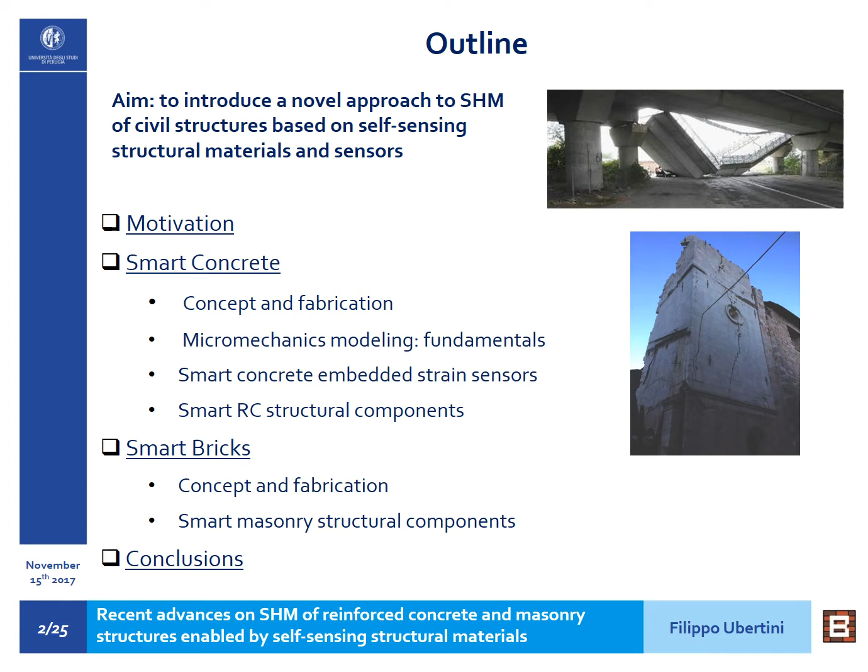So let's come to the motivation of the work. The research I'm presenting is framed in the field of structural health monitoring, which refers to all those technologies that try to use the information provided by sensing systems installed over a structure to understand the state of the structure and to possibly detect and locate damage forming in the same structure.

The application is anticipating major collapses and providing information useful for an optimal organization of maintenance and retrofitting strategies, with applications on aging infrastructure networks as well as cultural heritage structures, for instance exposed to seismic hazard. Applications of SHM in civil engineering are, however, still limited.

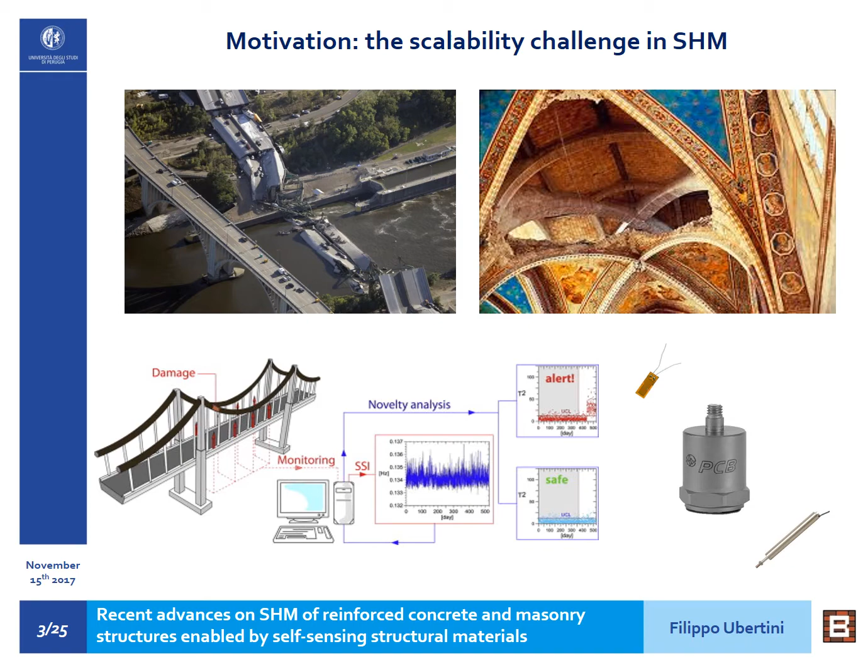One of the most important challenges limiting such applications, in our opinion, is what we call the scalability challenge or scalability issue. With this term we refer to the circumstance that sensors used for SHM are typically very small compared to the large sizes of the structures being monitored, with the consequence that the damage detection and localization task becomes more and more difficult as the size of the structures increases.

One possibility of overcoming this issue is going towards self-sensing structures and self-sensing systems. A self-sensing structure is essentially a structure made of a special material that is itself a sensor. The material can provide information on its state of strain and direct information regarding the formation of a crack or damage. In this slide, for instance, I show an example of a self-sensing pavement.

This is a road pavement made of a special smart material that is able to sense the presence of a vehicle and to weigh in motion this vehicle, providing information that can be used for fatigue evaluation of the pavement itself or fatigue evaluation of the substructure, for instance a steel bridge, and for understanding the state of stress in the substructure and so on.

In this research we achieved this smart property in concrete and clay bricks by doping these construction materials with electrically conductive nano-inclusions. In particular, we'll see nanotubes, carbon nanotubes that create conductive networks inside the materials such that the materials themselves become conductors.

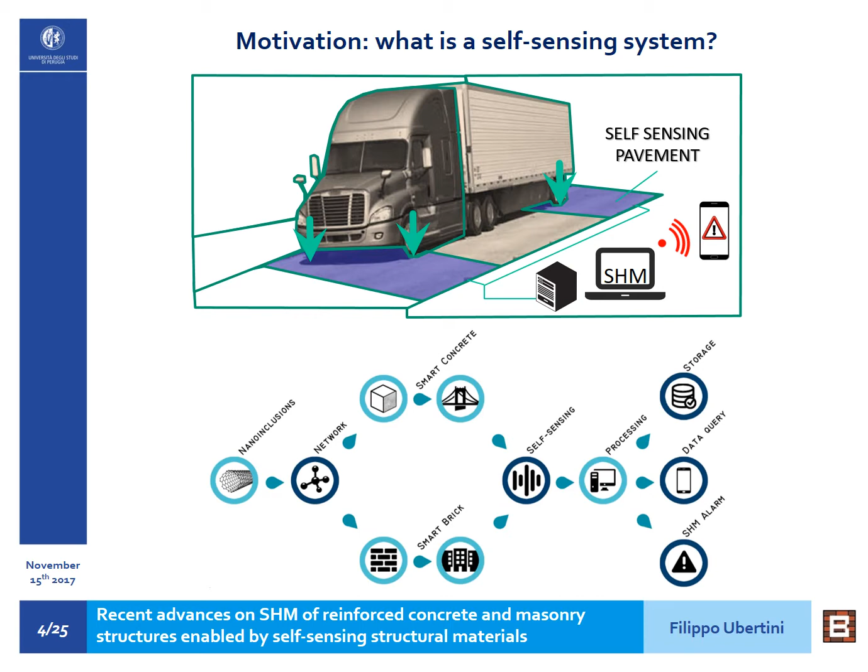This way we achieve smart concrete and smart brick that are self-sensing in the sense that they can output measurable changes in their electrical properties under application of an external mechanical input, particularly when they are strained. This information can be easily processed for SHM purposes for direct crack detection, therefore solving the scalability issue I was mentioning at the beginning.

So let's come to the smart concrete technology. The idea of smart concrete is actually not new. It was early proposed by Deborah Chung at University of Buffalo in the early 90s, and in recent years this topic has received considerable attention with a lot of scientific papers devoted to smart concrete.

Smart concrete essentially is a concrete with dispersed electrically conductive nano-inclusions such as nanofibers or carbon nanotubes that create conductive networks, making the overall composite become an electrical conductor. What is very important here is the proper dispersion of the nano-inclusions or nanofibers, which needs to be achieved with suitable fabrication procedures, as we will see in the next slides.

But if the dispersion is good, then we can achieve a very nice percolation-like behavior, as shown on the top right diagram of this slide, where the electrical conductivity suddenly increases when the amount of nanofibers or nanotubes or nano-inclusions reaches a critical threshold that is called the percolation threshold.

When the material is at percolation, it's not only a good conductor, but also a very nice strain sensor. So for instance, if we measure the electrical resistance across two points of a specimen using embedded electrodes, we obtain a quantity that is very sensitive to the strain.

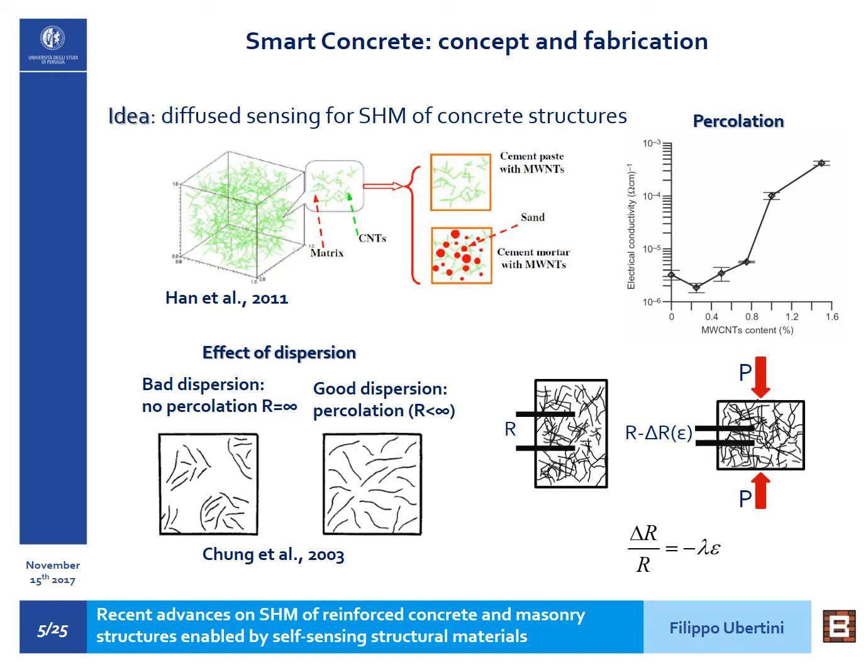If we apply a uniaxial compression load to the specimen and induce a uniaxial compression strain, we also induce a reduction in the electrical resistance. The relative change in electrical resistance is actually very close to being proportional to the uniaxial strain through the coefficient lambda, which we call the gauge factor of the sensor.

Here are a few highlights of how we fabricate smart concrete and smart concrete sensors in our lab at University of Perugia. On the top left you see the fabrication procedure, where we first disperse the nanotubes in water using tailored chemicals called dispersants. Then we improve dispersion of the nanotubes through magnetic stirring, and in most cases through sonication and mechanical mixing.

Then we add the aggregates and the plasticizer to improve workability. We cast the composite into oiled molds, we embed the electrodes, and at the end we have these cubic smart sensors made of cement paste with nanotubes, or mortar with nanotubes, or concrete with nanotubes.

On the top right of the slide you see a few pictures of concrete specimens, whereby the white specimens are normal concrete and the dark specimens contain nanotubes, where it should be noted that only 1% of nanotubes are used in this case. You see how significant the change in color is, achieved with such a small amount of nanotubes, which is very remarkable.

On the bottom part of the slide you see SEM pictures showing the nanotubes creating a very nice network when dispersed in water on the left, and on the right you see the nanotubes creating the network when they are inside the hardened cement matrix.

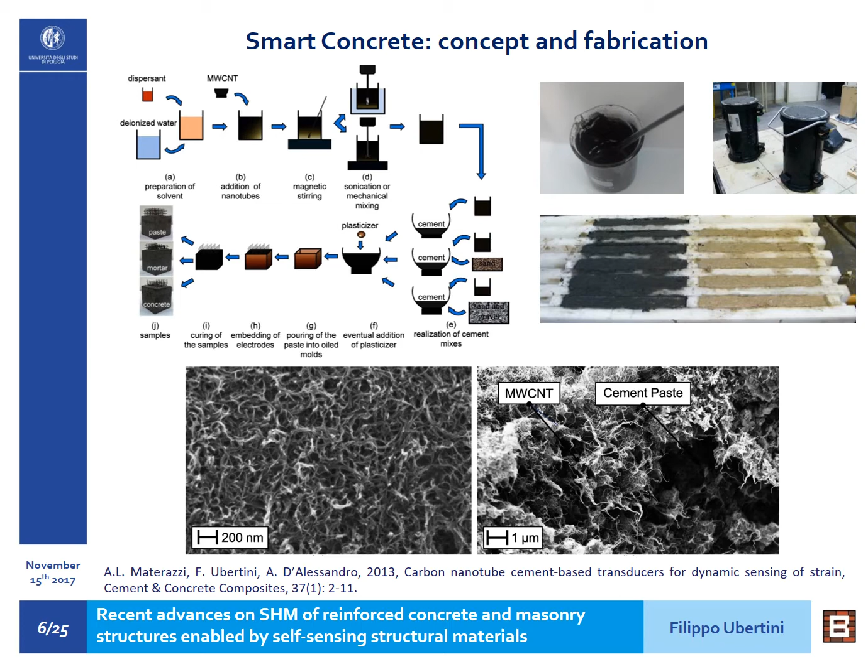Modeling the behavior of these composites is very important, especially to properly relate their electrical response to their state of strain. To this purpose, we have recently developed a micromechanics framework that is able to predict the overall properties of the composite, such as the elastic tensor and the electrical conductivity tensor, through a homogenization approach.

This method goes effectively from the nanoscale, modeling the single nanotube and its interface, to the microscale, accounting for the orientation of the nanofibers or nanotubes, to the macroscale, considering a representative volume element with a certain amount of dispersed nanotubes.

In this framework, we have considered peculiar aspects of these materials, such as the tendency of nanotubes to agglomerate into bundles that have a shape similar to the one shown in this SEM picture, the typical shape of an ellipsoid. We also take into account that the nanotubes are not straight, but rather they are bent and can assume curved shapes.

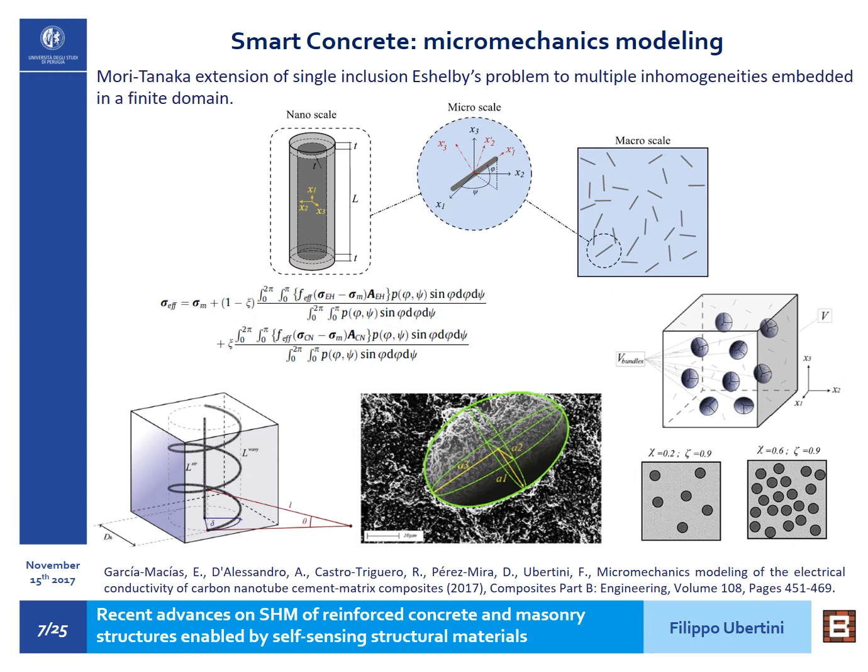With this framework, most importantly, we are able to properly model the strain sensing capability of the material, which means the change in electrical properties under application of a mechanical strain. As we have shown in previous work, we can identify three main mechanisms that govern this piezoresistivity.

The first one is the change in volume that causes reorientation of the fibers, which is taken into account through the so-called orientation distribution function. This is 1 when the nanotubes are uniformly and randomly oriented, and takes values different from 1 when the material is strained.

The second mechanism is the change in conductive networks that is due to strain. For instance, in strained conditions, there is a lower or higher probability of formation of conductive networks for a given amount of nano-inclusions, depending on the material being stretched or compressed.

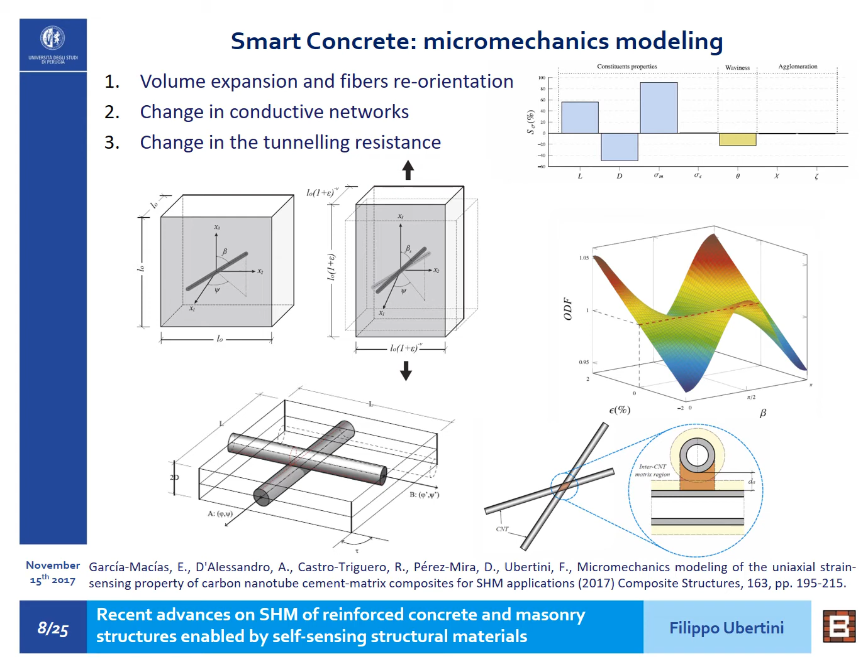The third mechanism is a change in the tunneling resistance, the resistance with which electrons jump from one nanotube to the next, and this change in tunneling resistance is due to the applied strain.

Here we see some results of the application of the proposed micromechanics framework. On the top you see results referring to cement paste with carbon nanotubes. In the middle part of the slide you see results referring to cement mortar with nanotubes, and on the bottom part you see results of concrete with carbon nanotubes.

On the left, the diagrams show the gauge factor against the amount of nanotubes in the composites, and on the right you see the overall electrical conductivity of the composite against the amount of nanotubes. The different lines show results referring to different values of the conductivity of the nanotubes, and the black squares show experimental results achieved in our lab.

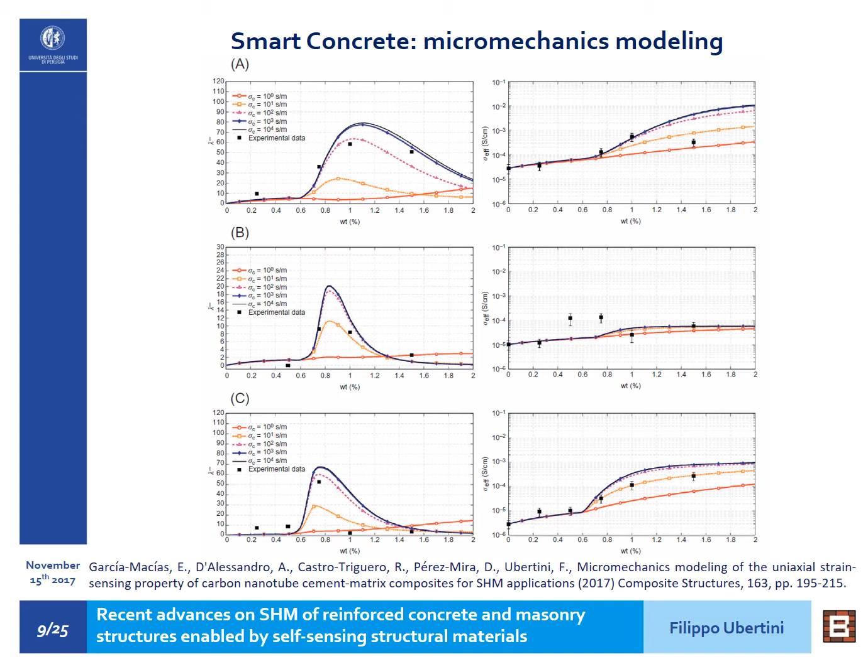What's very important from this result is that both theory and experiments confirm there exists an optimal amount of nanotubes that corresponds to a maximum gauge factor of the material, and this optimal amount of nanotubes is close to the percolation threshold. It's also notable that the theory can interpret the experimental results quite well.

Here let's come to the application of this smart concrete to manufacture strain sensors to be embedded into reinforced concrete structural components. On the top left of the slide you see typical cubic sensors that we fabricate in our lab. They are typically 5 centimeters by 5 centimeters by 5 centimeters, and they have 4 mesh electrodes embedded inside. The reason we have 4 electrodes is that we want to measure the electrical resistance with both a 2-probe or a 4-probe configuration.

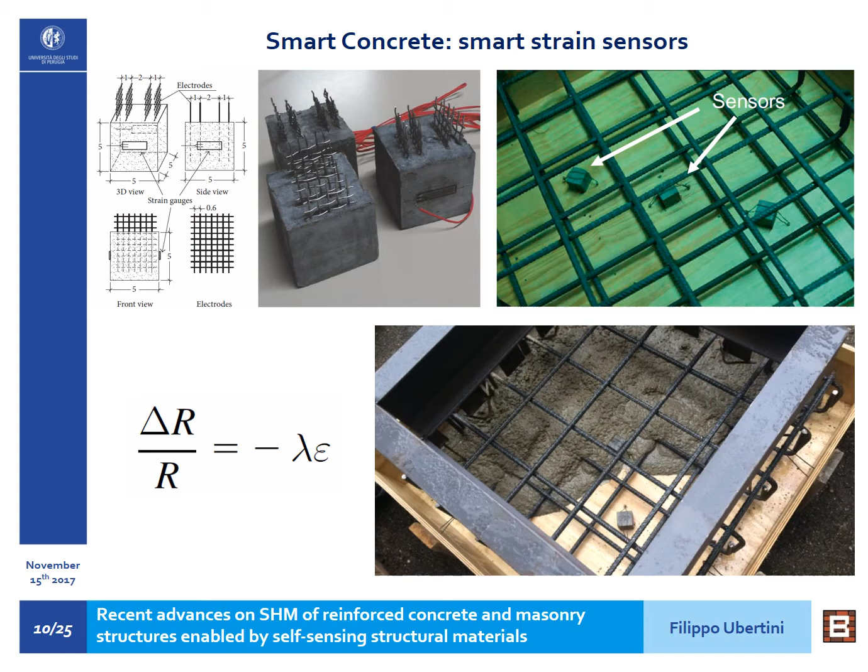On the right pictures of the slide you see sensors installed in an element before casting of concrete. Here we see results of the application of these sensors, in particular results of these sensors being tested in axial compression machines in the lab.

On the top right of the slide you see measured strain through strain gauges attached on the sensor's faces under the application of triangular loads, and corresponding relative change in electrical resistance in blue. You clearly see that there is a very good correspondence between strain and electrical response, which is also the case on the bottom right when applying dynamic loads, so sinusoidal loads with increasing frequency.

On the left you see the strain measured by strain gauges in a typical test with triangular loads, as well as the strain estimated by using the electrical output from a smart concrete sensor, in red. You also see that the relationship between change in resistance and strain is actually very much linear, as we assume in a very simplified model.

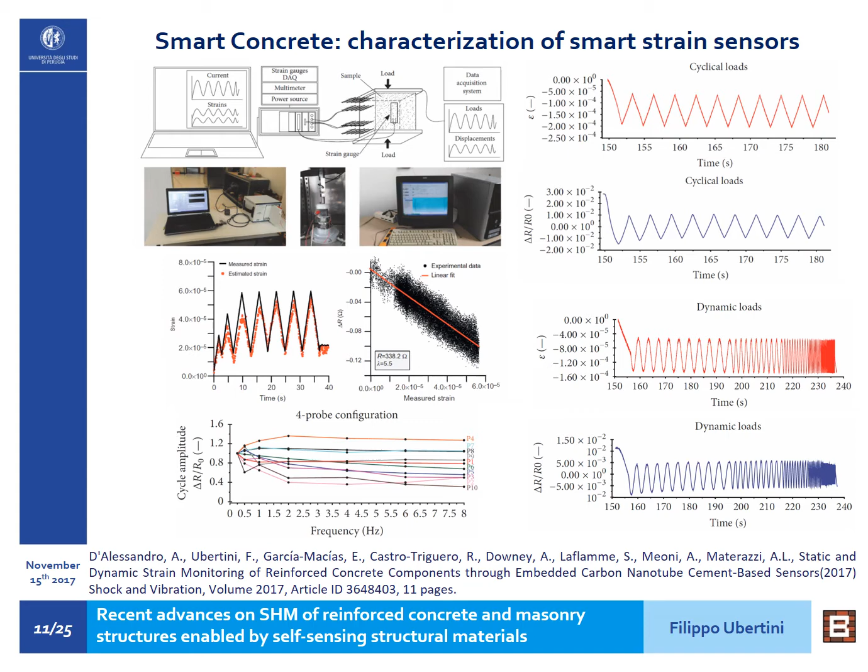What is also interesting is to investigate the amplitude of the response in terms of relative change in electrical resistance as a function of the mechanical frequency of the load acting on the sensor. This, which is called the frequency response function of the sensor, is typically a function that can be slightly increasing or slightly decreasing with the applied frequency, and we will see how this behavior can be justified in the next slide.

Here we see the application of the sensors when embedded into a reinforced concrete beam arranged in the lab. On the top right you see what happens when a person steps over the beam and then steps out from the beam, and this test is repeated 4 times.

In red you see the response measured through a strain gauge attached to the cement-based sensors, and in blue you see the response in terms of electrical current of the sensor placed at the mid-span. Clearly you see that with the cement-based sensors you detect the loading and unloading of the beam in a very clear way, and this is valid for all 4 times that the load is applied to the beam.

Then you also see the results of a test hitting the beam with a hammer in random locations over the beam. You see in red the measurement of a strain gauge, and in black the measurement of a smart concrete sensor at the same location as the strain gauge.

If we take a detailed view of a single hit, you clearly see that the time series of the measured strain is very well superimposed on the time series of the electrical output of the cement-based sensor.

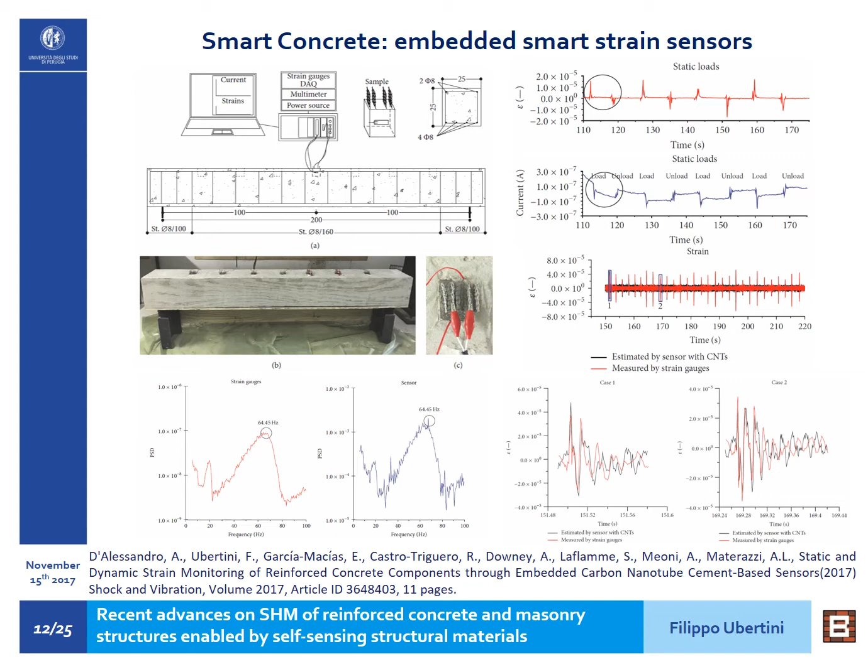Another important aspect in modeling the behavior of these sensors is being able to reproduce their time response. In this case, when time is involved, a modeling approach based on lumped electrical circuits is probably the most suitable method. In this slide you see the comparison between a typical model used in the literature...

The sensor is reproduced through an electrical resistor whose value changes with the applied strain, placed in parallel with a capacitor that reproduces the dielectric behavior of the material, and then of course there will be some contact resistance to close the circuit. On the right you see a more advanced model where we also add a third branch to the circuit.

That branch reproduces the piezoelectric behavior of the sensor that we have shown is present in these materials. Essentially, when the material is loaded, a little bit of voltage develops in the material itself. So the material is not only piezoresistive, but it also has some piezoelectric behavior, and this is introduced in the third branch of the model.

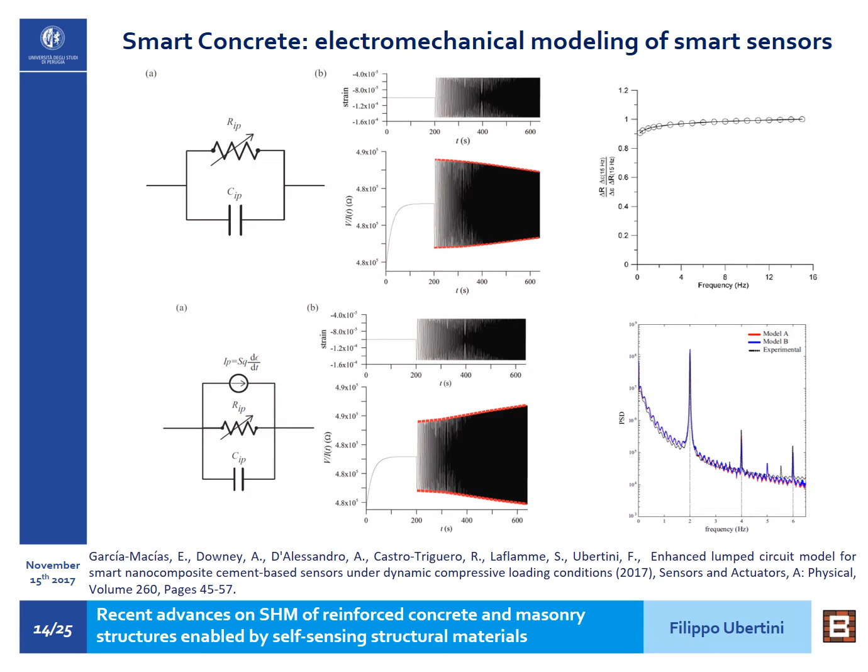Also very notable is that a similar model is able to reproduce the appearance of superharmonics in the response under harmonic loading, which is also something that we get from experiments, as shown in the diagram on the bottom right of the slide.

So let's now come to a second way in which smart concrete can be used in structural health monitoring. In this case, we do not want to use smart concrete to manufacture strain sensors, but rather to fabricate structural components that are fully made of conductive concrete. In this way, we could fabricate a local joint between a beam and a column, or build the rebar cover in a critical location of a structure.

This concept can be leveraged for damage detection, for instance, by trying to reproduce the electrical behavior of the material through a mesh of electrical resistors, as shown in the top left of this slide, whereby we can identify the values of these resistors by matching the experimentally measured electrical response of the material. When there is a damage in the material in the form of a crack, we are able to see this damage in the form of resistors with very high resistance.

The first problem that we have in applying a similar concept is that of eliminating the time drift in the electrical response of these materials that is due to the polarization, so the charge accumulation under a constant electrical field. To overcome this aspect, we have proposed recently a biphasic DC measurement approach, whereby the input we give to the material is not a steady input.

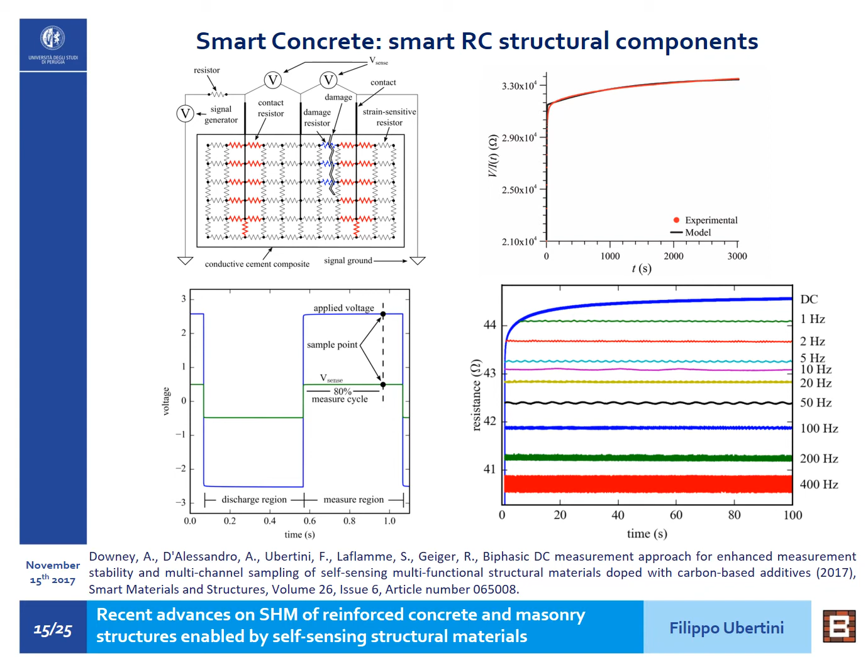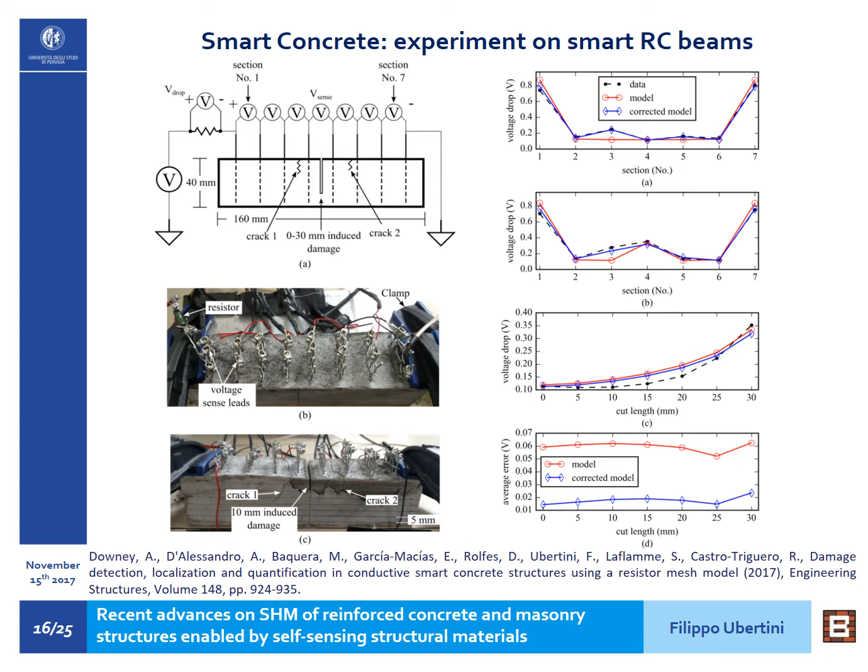So we can conclude that this approach of locally measuring the electrical resistance of the material, or the voltage drop under an external voltage input, is feasible for detecting and locating a damage.

What we see in these results is that in a very initial part of the diagram, we have increases in voltage drop with increasing load, and those are essentially due to the deformation that the load determines in the material, and here what dominates is the tensile strain that results in a local increase in electrical resistance because the electrodes are in the bottom part of the beam.

And then at a certain point, when a damage forms, a shear crack starts to form outside of the region where we have the electrodes, we have sudden changes in the voltage drops across different sections of the beam.

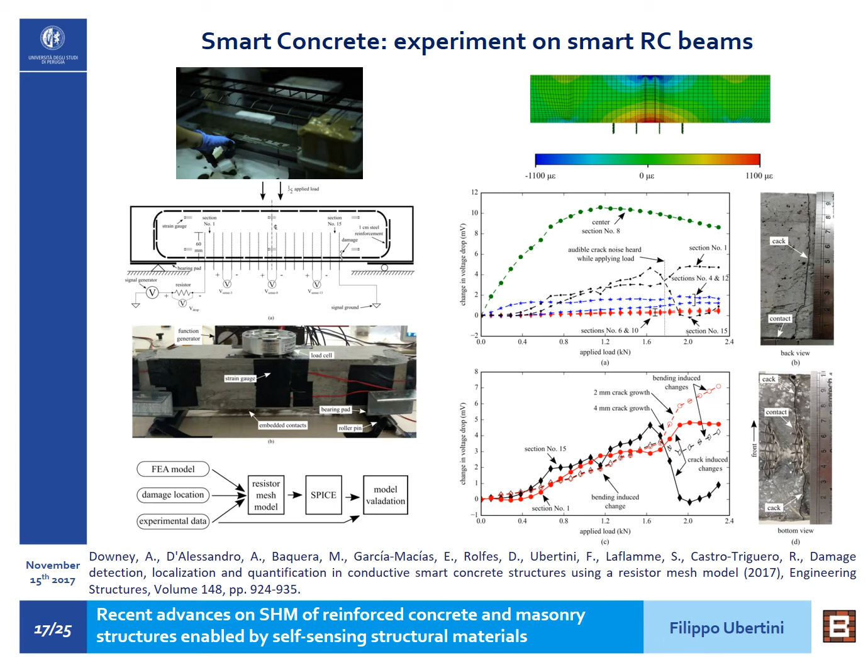So these changes clearly highlight that something has happened in the beam, which confirms again that a similar approach based on a resistor mesh model can allow damage detection and localization, leveraging the electrical conductivity of the material.

Here is another example conceived to demonstrate the possibility of detecting damage in smart concrete structures. The example consists of a smart concrete plate, again made of cement paste doped with multi-wall carbon nanotubes. We have put this plate on a device that allows us to apply hammer hits with controlled energy, to reproduce a certain number of hits, all of them having more or less the same energy.

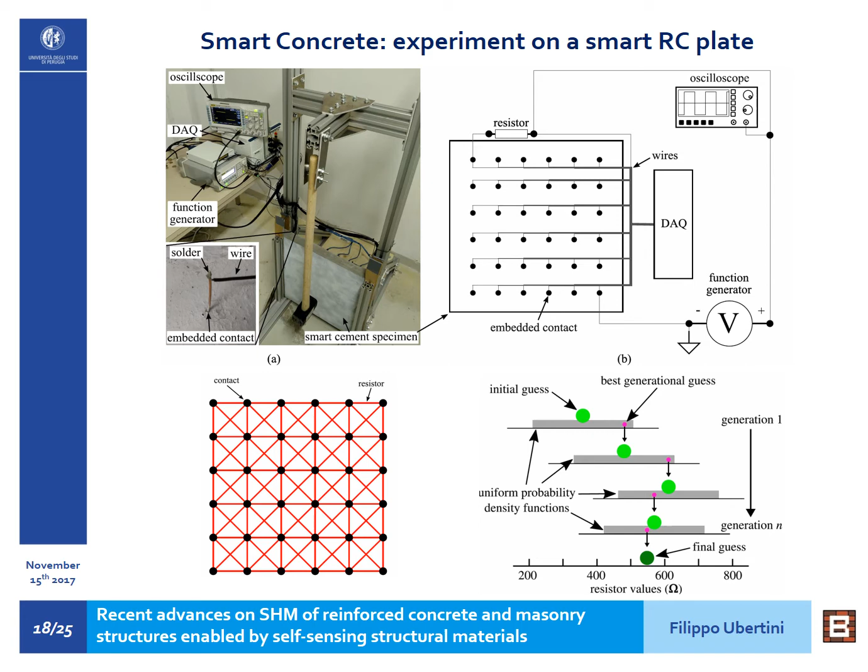Again, we try to apply a resistor mesh model as shown on the bottom left of the slide, where the red lines are the resistors, and we try to identify the properties of these resistors by matching experimental and model responses in terms of voltage drops.

Here we see the results of application of an optimization procedure to identify those resistor properties by solving in an approximate way the inverse problem of identification.

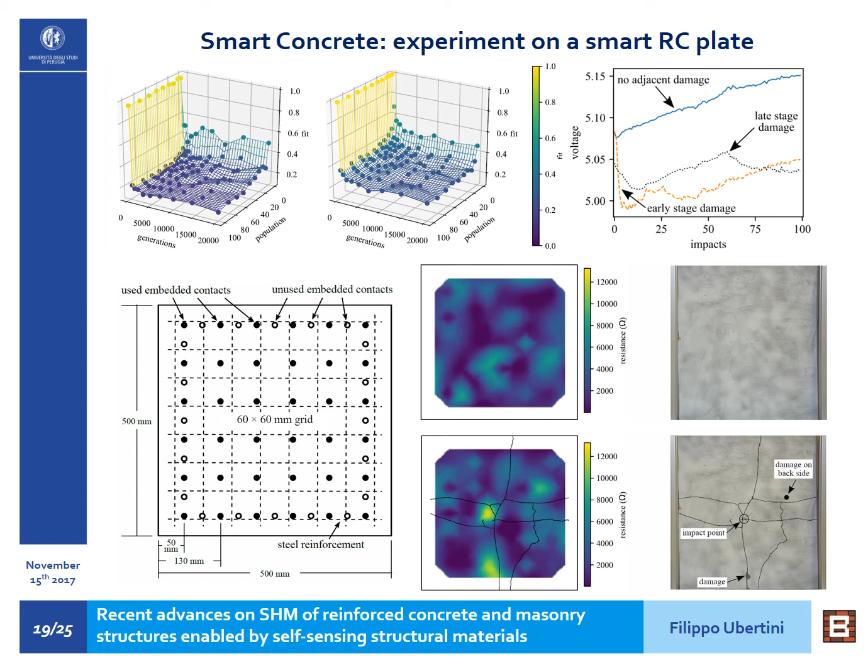And clearly in these regions we have a local increase in the values of the properties of the electrical resistors that we achieve after solving the inverse problem. So what we can conclude here is that a resistor mesh model like the one proposed can allow damage detection and localization in a smart concrete structural component such as a plate.

So to end this presentation, I would also like to extend the concept of self-sensing structural materials and sensors from the field of reinforced concrete structures that we have seen before to the field of structural masonry buildings.

So the idea is that of fabricating smart clay bricks, which are smart bricks able to detect and measure the strain within the masonry.

Of course, the vision is that of inserting a few of those smart bricks inside critical locations of a structure, so as to anticipate any change in the structural behavior, detect the formation of cracks and a change in the loading path within the structure, and possibly detect the damage at its early stage.

The idea of achieving a smart brick is similar to that of smart concrete, but here there is a big challenge of using the proper doping that has to be resistant to the very high temperatures reached during the baking phase. So we need electrically conductive inclusions that can resist about 1000 degrees Celsius.

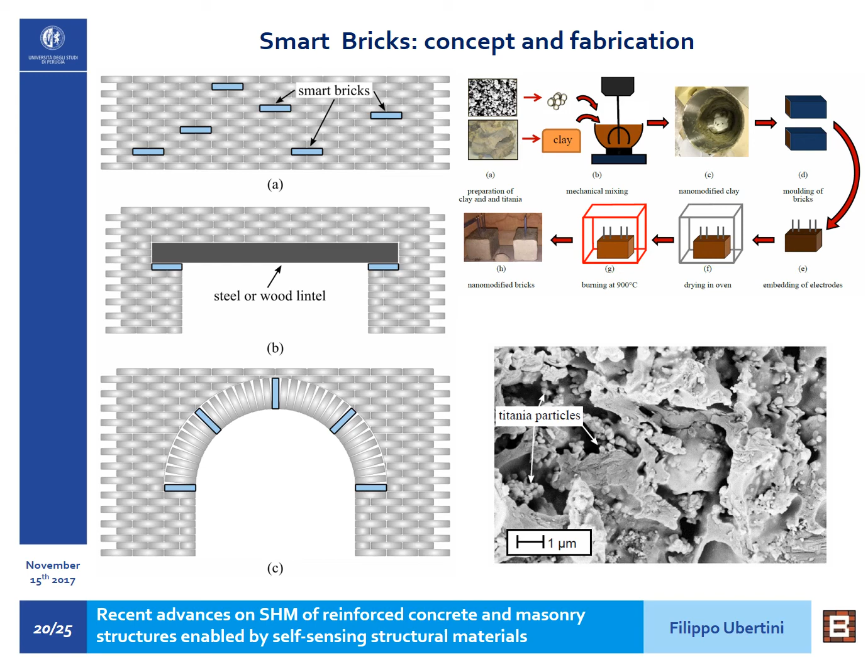And at this preliminary stage, since carbon-based particles are not suitable in this case, we propose to use titania, titanium dioxide particles, that can improve the mechanical properties of the smart bricks and can also increase its electrical conductivity. In the SEM picture in this slide, you see the titania particles after burning inside the clay matrix.

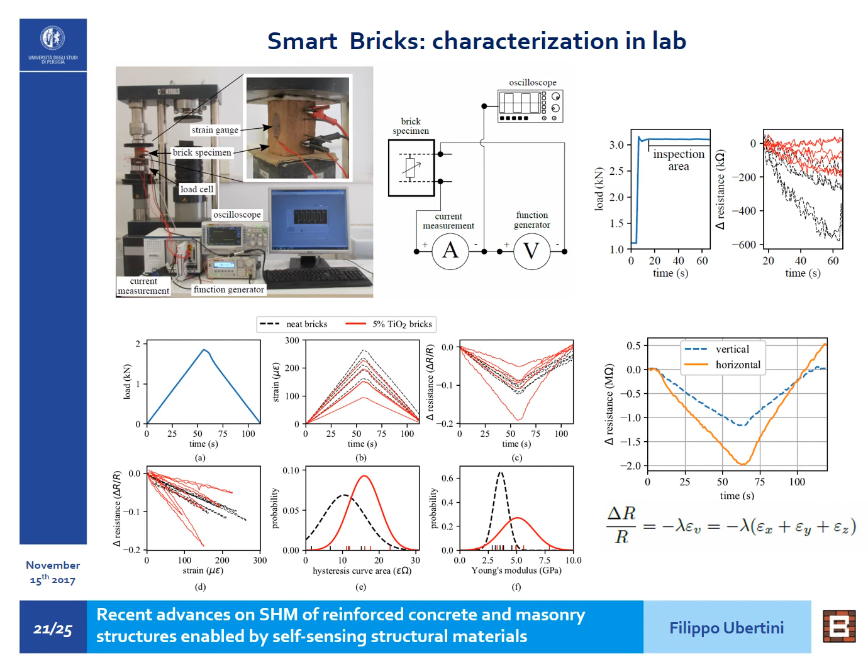This model is now being validated through a micromechanics approach, which I will not show you here, but is suitable for first level investigations. Here you see a demonstration application of the smart brick idea.

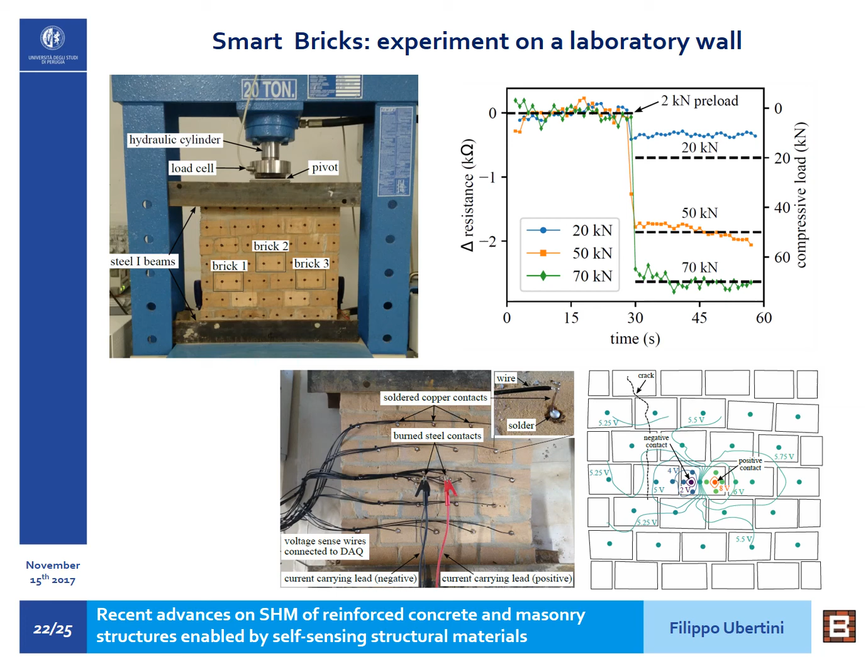In this example, we have a compression load that we can apply with some eccentricity with respect to the centroid of the cross-section. We have 3 smart bricks that are able to provide relative changes in electrical resistance proportional to volumetric strain. So we can model this system with a simple beam model, assuming the possibility of having cracking in bending.

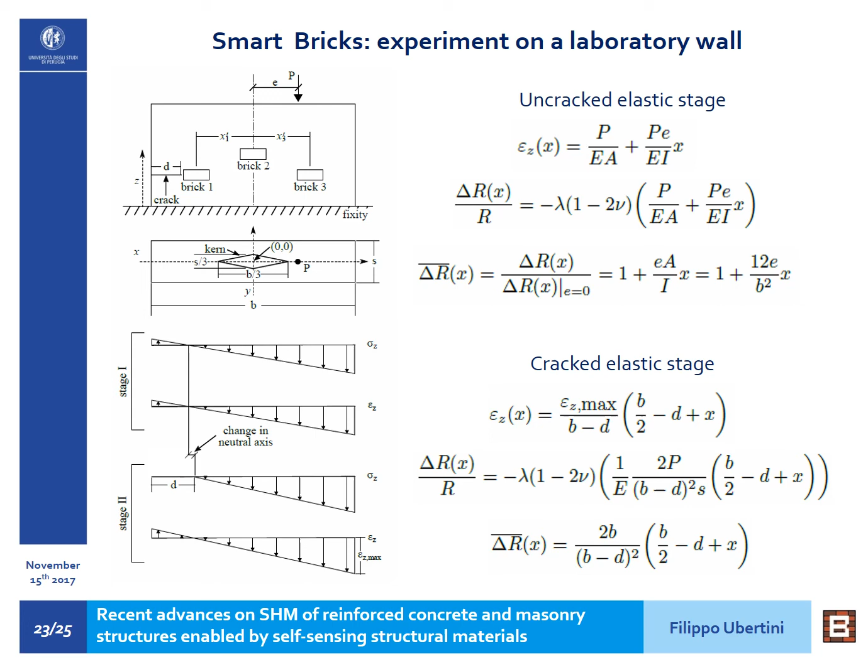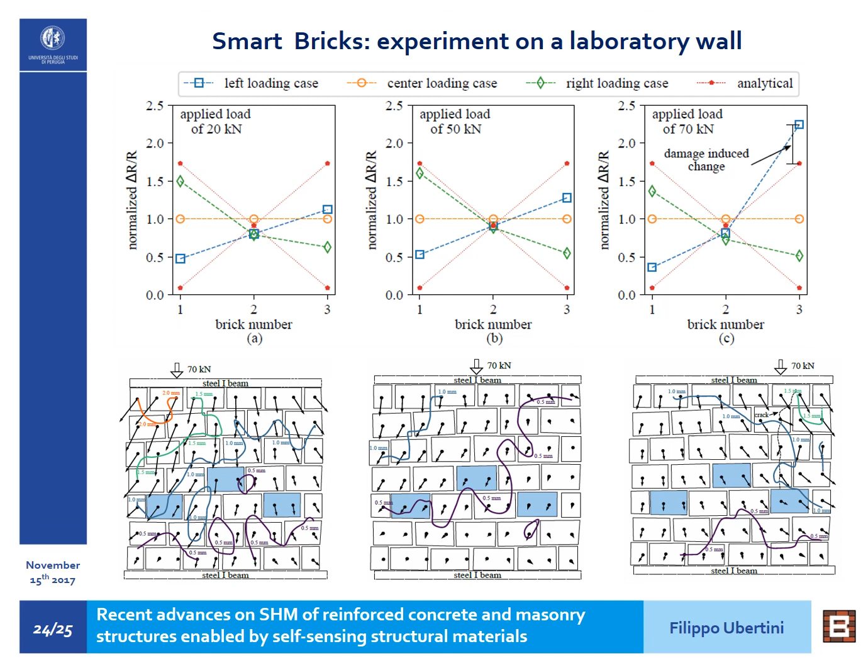So the formation of the crack has resulted in a clear change in the response of the bricks, and we can therefore conclude that the bricks are suitable for strain sensing as well as damage detection in a masonry structure like the one shown.

To conclude this presentation, I've shown you the concept of embedded smart concrete sensors that can be a durable solution for strain monitoring of reinforced concrete structures. We have shown that micromechanics modeling approaches as well as lumped circuit methods can be very effective for predicting the response of these materials and sensors.

We have been able to eliminate the polarization issue in the response of these materials under application of a constant external electrical field, and this has allowed us to achieve steady measurements that can be used for direct crack detection in smart concrete structures.

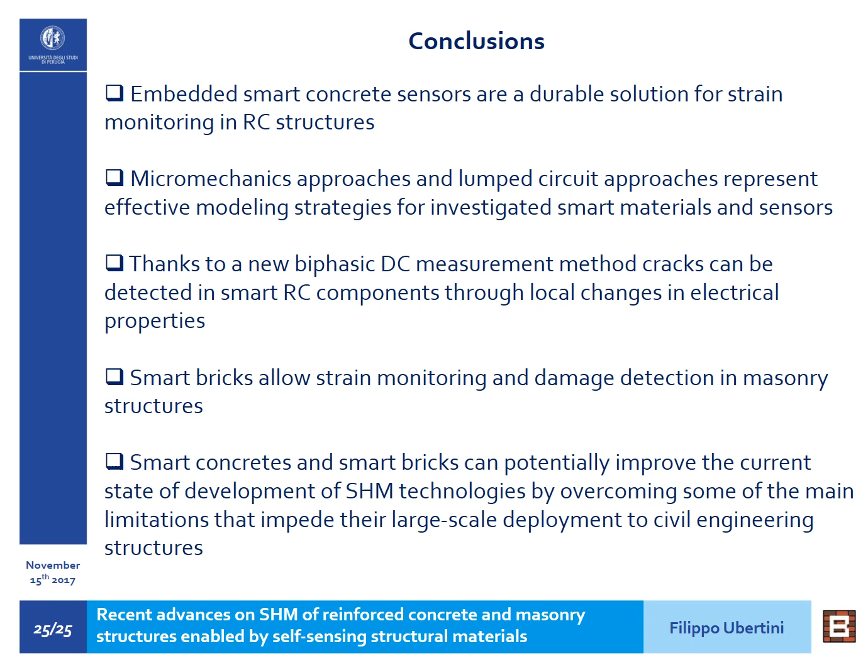Also, we have introduced the smart bricks concept that allows monitoring of strain in structural masonry and permits damage detection. Overall, we can conclude that smart concretes and smart bricks can potentially improve the current state of development of SHM by overcoming what I called at the beginning the scalability issue in structural health monitoring when applied to civil structures. With this, I thank you very much for your attention, and I would like to acknowledge the last...